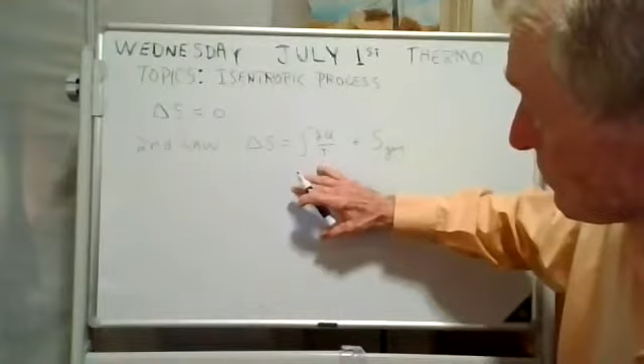Now, if the change in entropy is zero, that must mean that this term will be zero. And this term, well, let's put it this way: if this term is 0 and that term is 0, then you got 0 plus 0. Hey, that gives you 0. And so you have an isentropic process. Now, for this term to be 0,

what would be required here—let me, I'm always picking on Stuart, but I don't know if he's with us. Yeah, Stuart's with us. Stuart, I want you to answer this question: if this term here is 0, how could that be, Stuart? How could you get this term to be 0? What do you think? He's thinking. We're going to make that term 0. How do you make that term 0, Stuart?

Demute, unmute. Stuart, unmute and tell me how you get this term here to be 0. Uh-oh, he's still fixing his coffee. Never mind, he's busy. One way is if the heat transfer is 0, then this is going to be 0.

Now they have a fancy name for that. If the heat transfer is 0, they call it... Stuart wasn't going to help me. Let's go to my friend Spencer.

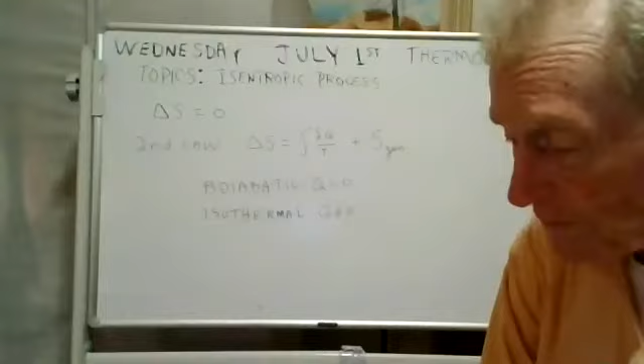Now an example of that would be if you had a bicycle pump and you push down on the handle there on your bicycle pump. See, what you're doing is you're compressing the air, and it gets hotter. I'll tell you what you do, get a bicycle pump and pump up your tire.

Push on that bicycle pump for about 100 times, and it doesn't do a heck of a lot to a car tire. You'll go from about 30 to 35 psi. I've done it before, but it'll take you about 100 pushes. You'll be wore out by the time you get 5 psi more in your tire.

But see, it's adiabatic. The temperature is changing. You can have a change in temperature, but the heat transfer is 0. What's making it hot is all that work. See, there's work transfer, there's heat transfer, they're different. And pushing on that bicycle pump, you're doing work and you're compressing the air and the air gets hotter. I hope you guys aren't confused.

If you are, ask me something. But there's a big difference between adiabatic and isothermal. Now, if this Q here is 0, well then this term is 0 because you're just dividing by Kelvin or Rankine temperature, and it's never 0 unless you're awfully cold in outer space.

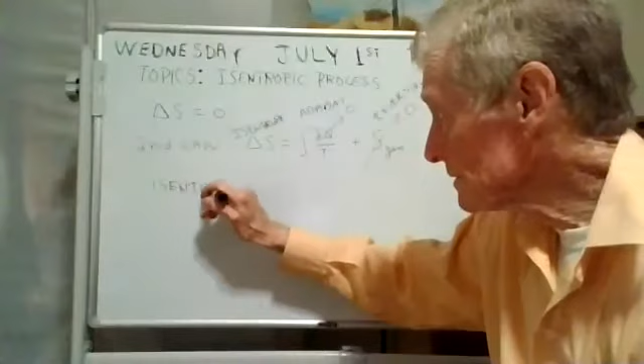But if you have a reversible adiabat, then you've got an isentrope. Let me write that down for you. See, if you have delta S equals 0, that's what an isentrope is. And another name for an isentrope is a reversible adiabat.

Now, I will tell you one little tiny wrinkle. It's possible to have an isentrope where these aren't zero. Let's say this comes out to be -5, and this comes out to be +5. That's just an example. But -5 and +5 could give you zero, couldn't it? So it's possible to have an isentrope that is not reversible, because if this is +5, that's not reversible. And if this is -5, that's not an adiabat.

Remember the rules about generated entropy. If it's 0, then you have a reversible process. If it's bigger than 0, you have an irreversible process. If it's less than 0, it is impossible - you have just violated the second law of thermodynamics. So it's possible to have an isentrope that's not an adiabat, but you're going to have a heat transfer out in order for that to happen.

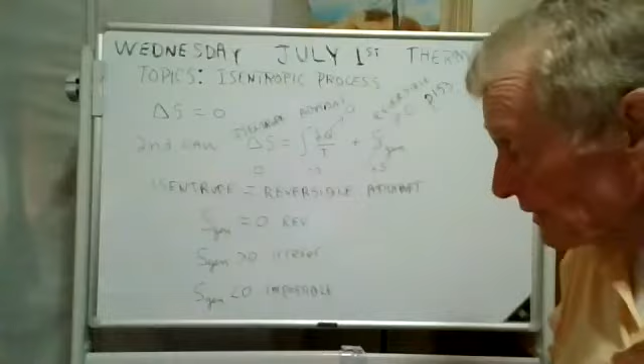Okay, now what we're going to do is talk about an isentropic process with an ideal gas. You can have an isentropic process with steam or refrigerant or ammonia or pretty much anything, but right now we're going to be talking about what happens with an ideal gas isentropic process.

Okay, do you remember we derived this equation? I showed you this equation, I don't know whether this was Monday or not. Hey, I'm going to go with little letters - you can write this with big letters, or you can write it with little letters. The little letters are really better.

We derived that equation from those Gibbs equations, those TDS equations. We derived the TDS equations, and then we derived this equation here for the change in specific entropy from those TDS equations, or some people call them the Gibbs equations. I wonder if anybody remembers that. Let me ask one of my wonderful students here. Cameron, do you remember us deriving this equation, talking about this equation? Yes, I do. Yay! Good deal.

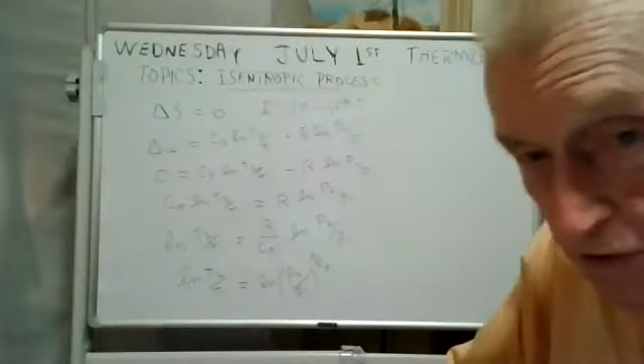Okay, now we're doing another algebra step. See if you can get to here now. Now this one is a little tricky, but you guys all took algebra. I bet you can get to there. Can you get from here to here? I hope so. Hope you can see that good.

Okay, well, we're almost done and we're going to have a wonderful equation for an isentropic process with an ideal gas. But I need the room, so I think what I'm going to do is write this up here where I have some room. And then we'll do an example. Wouldn't that be fun? Now let me write this one up here now.

All I did was just scoot it up there where now we got room, and I'm going to erase all this stuff here for a minute. All you need to know is all that stuff comes from an isentropic process

with an ideal gas. Now, I showed you guys this. I don't know if you remember, but R is equal to C sub P minus C sub V. I showed you that from scratch one day. We can go back over it if anybody wants me to. We don't have time to go back over everything.

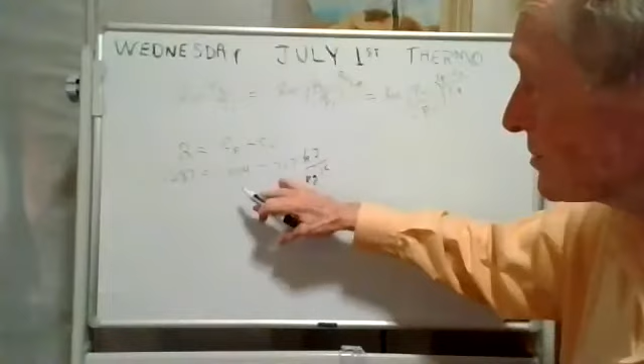So I'm going to erase this, but that was kind of fun to do. Hey, I didn't put the units on this deal here. What's going to happen to you if you don't put units on your stuff? See, that's the units: kilojoules per kilogram Kelvin. If you don't put units, you're going to lose a point. We don't want that to happen. Supposed to put units on there. Okay.

Now, see if you can get to here with me. We're almost done, I keep saying that, and then I can just keep on going, don't I? Can you write it like this? Can you get to here? I bet you can. Okay, 2 more steps. What's this now? See if you can get to here.

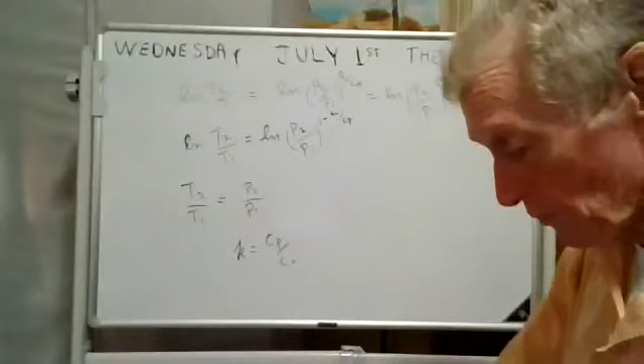Now, I'm going to define something called the specific heat ratio. What it is: C sub P over C sub V. It's always bigger than 1. It has a fancy name. It's called the specific heat ratio.

They've got them in the book back there. If you go back here in the book and look in the tables, I'm looking in the tables. Yeah, I see some K's back there. So I see some K's for a whole bunch of things, for steam, air, ethane, helium, etc. They have these in the tables in the back. They're called specific heat ratios.

But see, this is C sub V over C sub P. This is C sub P over C sub V. So what we have here is 1 minus 1 over K. That's what we have. Or you could write it like this. Ta-da!

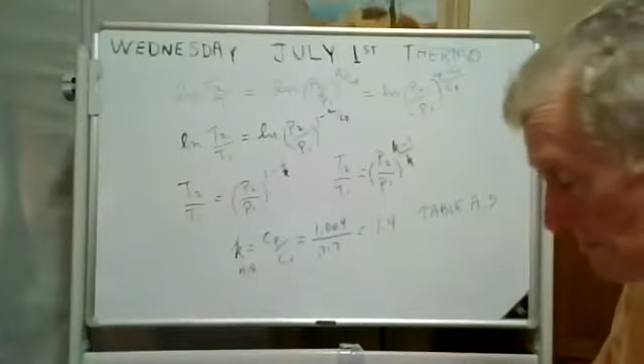Look it up when you get time, and you'll see K is 1.4. They have Ks for everything in there. For helium, if you wanted to find the specific heat ratio, it's 1.667. That's what they have in table A.2. You know, it really is 1.666 repeating forever. They rounded it off, is what they did. Okay, we got us a great equation there.

And that's a keeper, and we'll be using that on our example we're going to do here in a minute. Does anybody have any comment or question before I continue on with this fascinating topic of isentropic processes? Well, nobody said anything. Okay.

Now, there's another equation that would have been fun for me to derive. See, this equation here was derived from this equation here. We took that equation, and I know each of you are taking notes, anything I write down you got in your notes. We took that equation and we did some algebra. We did some algebra, oops, there we go. And bingo, we came up with a wonderful equation.

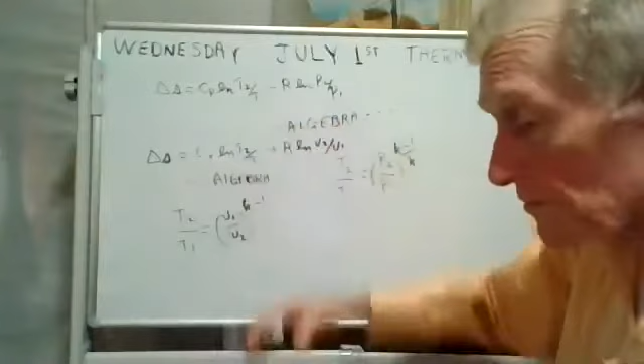And you got to be careful because you got a 2 over 1 here, but you got a 1 over 2 here. It would be fun for you guys to take that and follow the method I did a little while ago and see if you could come up with this equation. So let's put those together. I like this. Ta-da, and now we have a really nice equation we can use for an ideal gas isentrope. Ideal gas isentrope. And you know what an isentrope is - an isentrope is when delta S is 0. Okay, well, great.

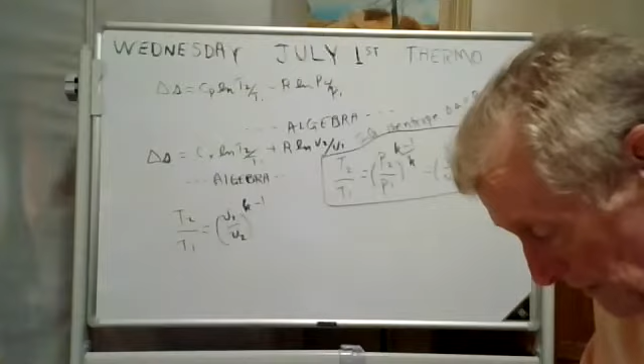Anybody comment or question on that before we do an example? Well, okay. I thought maybe we could do problem 6-51. We're going to do problem 6-51 here in just a minute, if nobody has anything to say. All right.

And you know the method for doing problems in here. We do the same thing over and over and over again. We do a device sketch, we do a PV diagram. You're not going to forget a PV diagram, are you? You would not forget that important thing, would you? Did you notice on that exam, I think there were 2 questions that required a PV diagram. And now we're learning to do TS diagrams. So from now on, for a while at least, do both.

Do both. Okay, well, let's do that. And then what? After you do the device sketch and the PV and the TS diagrams, then what? Well, you use the first and second laws. That's what you do. And you got to decide now, is it a control mass or a control volume? And you know the difference - you know what a control mass is and what a control volume is. All right, well, let me find this 6-51 and we'll do that. That sounds like fun. Here we go, 6-51.

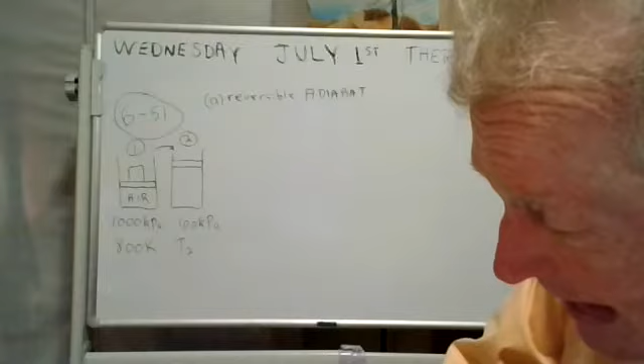We've learned that, and I'm going to pick on Parker, I think. Let me see if I want to pick on Parker or not. Yeah, I'm going to pick on Parker, he's a good sport. Parker, we learned a fancy name for a reversible adiabatic. What is that fancy name, Parker? Unmute. I'm not sure.

That's okay, that's why I bug you guys. Because if I bug you, you'll get it. Parker knows this, it just hasn't penetrated, that's all. Parker, this is called an isentrope. Have you heard that word before, Parker? Isentrope. Parker, say yes. He had to go answer his front door, I think. But if you have a reversible adiabatic, you have an isentrope.

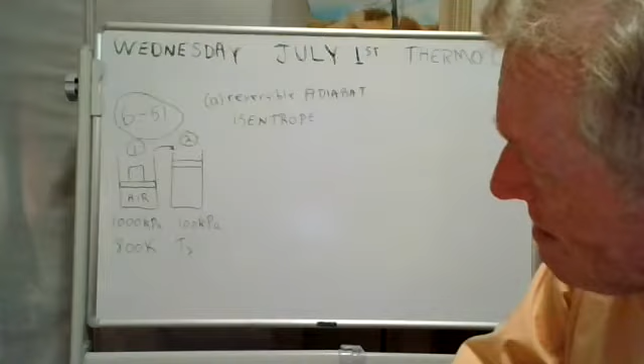What's an isentrope? Let me pick on my next wonderful student. Cameron, what is an isentrope? You tell me, Cameron. Unmute. What is it? I'm not too... I don't think I'm too sure, honestly. That's okay, it's early in the morning and sometimes you have to wake up.

I know somebody must have listened to me. How about my friend Aubrey? Aubrey, what is an isentrope? Unmute, tell everybody what an isentrope is. Is it where the delta S is equal to 0? Yay! Good for you, Aubrey. It's when delta S is 0. That's what an isentrope is.

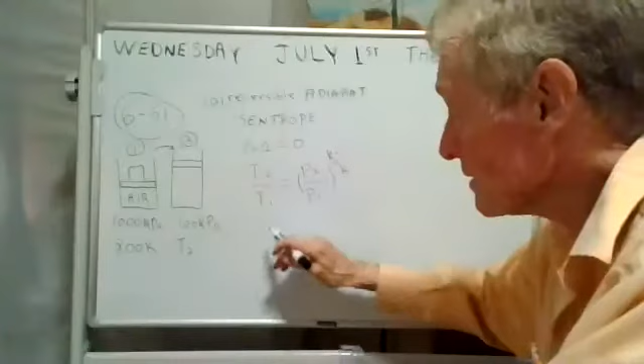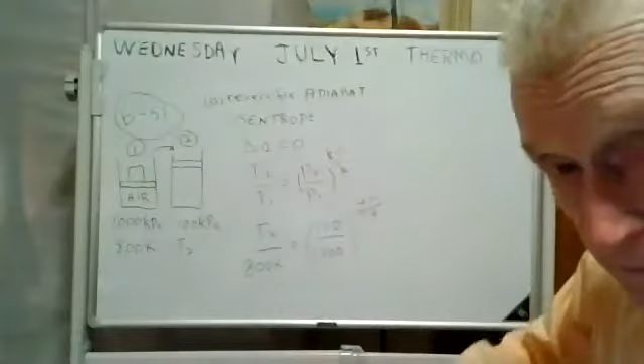And if you have an isentrope and it's reversible and it's an adiabat, then you can do this. Now we know what T1 is. T1 is 800K. And we know what P2 is, and we know what P1 is. And if it's air, we know what K is. So we can get T2 from this equation. Now I'm going to shut up for a minute and a half.

And I want you to do that. This class here is a participation class. You don't need to just sit and watch me do stuff and have all the fun. I'm going to shut up. I want you to find T2. Go for it. Get your calculators out.

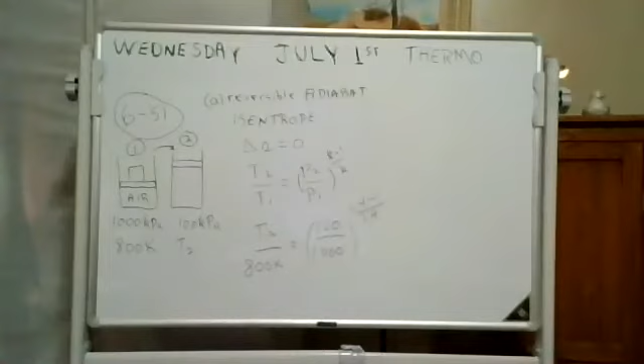Okay, I got an answer. Let me go fishing here for a wonderful student. How about my friend Cameron? Cameron, did you get that T2 yet? If I typed everything in right, I got 414.357. That's what I got, I got 414. I got 414.4 if you rounded it off. Is that close enough to yours, Cameron? Yes. Great, hey, we just got T2.

It's 414. Let's do our PV and TS diagrams now, shall we? Doesn't that sound like fun? If you're all okay, I'm going to erase it because I need the room to do the PV and TS diagrams.

Hey, it got colder, like I said. You see, it's just the opposite of compression. When you compress, it gets hotter. When you expand, it gets colder. Now, let me ask you this, though. I usually do heat transfers in red. Let's put a red heat transfer. There you go.

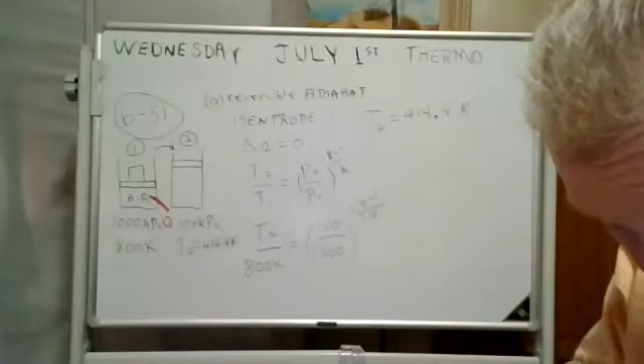Unmute. Tell us what you think the heat transfer is on this reversible adiabatic process. Going in or out? Oh, it's going out, Aubrey says. Nope, it's not going out. Guess again, Aubrey. What's the heat transfer on this reversible adiabatic process? Then it must be going in. Nope, it's not going in either. Oh no. I want you to think what the word adiabat means.

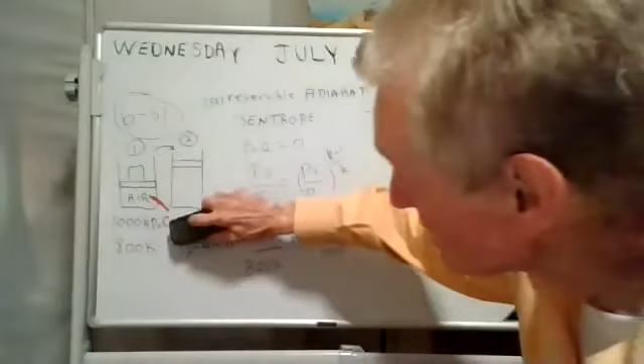Oh, adiabatic. Q equals 0. Yeah, that was not very nice of me, was it? That was a mean trick. There is no heat transfer. It's an adiabat. There is no heat transfer. Now maybe Aubrey will remember that.

I bet she will. Now let's draw the PV and TS diagrams. Here we go. Okay, now you're more familiar with the PV diagram. Now this is air, so you don't want a vapor dome.

Don't put a vapor dome, it's air. I tell you what you could do though. You could go 800 Kelvin, and you could have a 414.4 Kelvin. You could have those. That'd be okay.

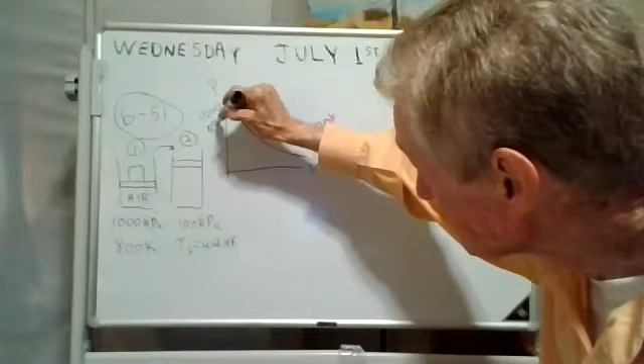And the pressure at state 1 is 1,000 kilopascals, and here's state 2, 100 kilopascals, and here's your process. Yeah, there you go. There's your process. See, they call that a process.

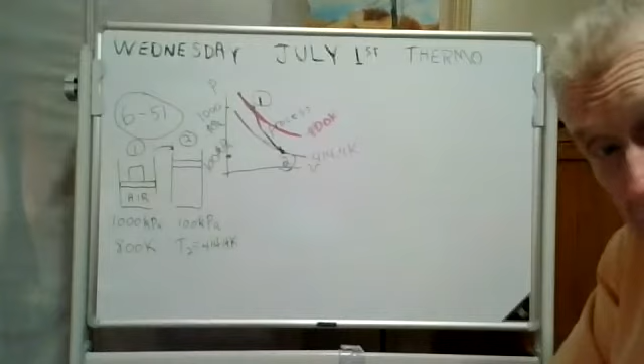We are going from state 1. And here's some of the properties of state 1: there's the pressure, there's the temperature. And we're going to state 2, and here's some of the properties at state 2: you have the pressure and the temperature. And you draw - it's not a straight line. It usually isn't, sometimes it is, but in this case it's not a straight line. That's the process on a PV diagram.

Now let's do a TS diagram. We've got to learn how to do TS diagrams. You don't put a vapor dome in there because it doesn't liquefy, it's air. At the temperatures and pressures like that, it doesn't liquefy.

And now let's put in our isotherms. They're flat. See, the 800 goes like this. There's your 800. And then the 414 goes like this. There's the 414.

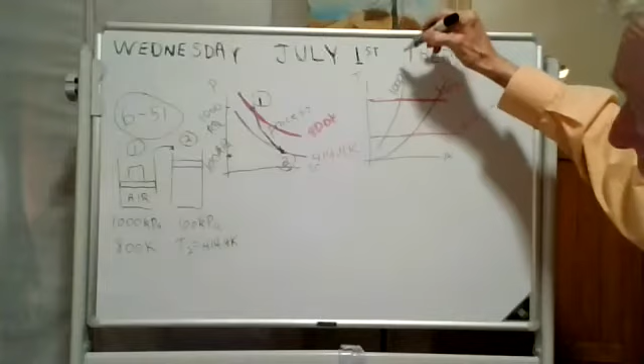And now for the pressures. Well, pressures on a TS diagram, they're like this, they go like that. This is the high pressure, this would be the 1,000 kilopascals. This is the low pressure, this is 100 kilopascals.

Let me doctor this up just a little bit here. There. Yeah, there we go. And now here's our process. Here's state 1, here's state 2, and it goes straight down. There's our process. And you notice it goes straight down because the entropy doesn't change, remember? Delta S equals 0. It's an isentrope.

This process is an isentrope, so it has to go straight down. See, if it curved off to the right, that means the delta S would be positive. If it curved off to the left, the delta S would be negative.

So what? Well, let's finish the problem. They wanted something else, I think. If you just woke up from a daydream, we were doing 6-51. Let me read it here. Piston expanded - what are we supposed to do? Part A, find the final temperature. Well, we did that. Okay, now they want the specific work.

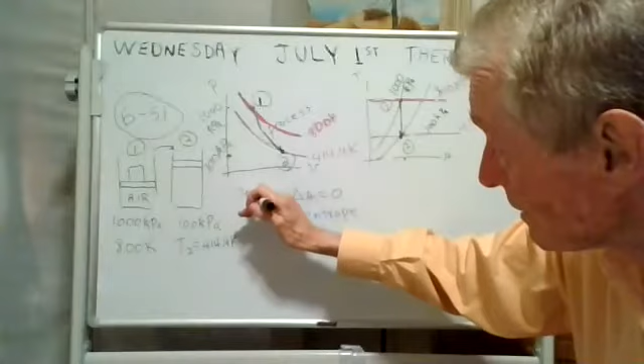Here's what they want us to do. They want us to find that little w there. Okay, well, we have an equation for that. Now, we have an equation for little w that goes like this for polytropic processes. This is an isentropic process, but let me show you the equation for the polytropic process. It goes P2V2 minus P1V1. Now, I showed you this - in fact, I derived that equation for you guys.

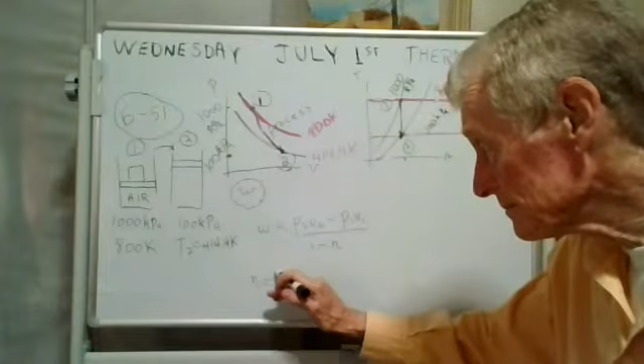And what we have here is a polytropic process where n is equal to k. N is equal to the - what do they call that - the specific heat ratio. Now, how do I know that? Let me come back to that. Let's go ahead and solve this, and then I'll try to explain how come we know that.

Now, I'm too lazy to actually put those numbers in. It's a lot easier for me to just go R T2 minus R T1, and in this case you go 1 minus K. See, P2V2 is equal to RT2, and P1V1 is equal to RT1. So basically, we're just going R delta T all over 1 minus K. Okay, well, let's do that. Now, R for air is 0.287 - probably should put our units in there.

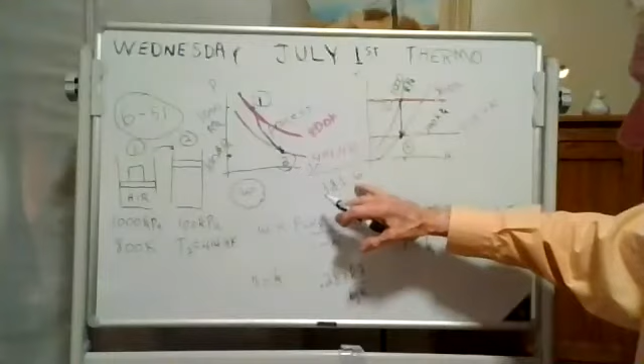And the change in temperature, I can't do that in my head. But I can subtract. Did I do that right? When you subtract that from 800, is that what you get? I think so. So what you get here is...

385.6 divided by 1 minus 1.4. Okay, we're going to get the work done. Wouldn't the 385.6 be negative? We're going from a higher temperature to a lower one.

We have our first honkin' thank you point. And who was that, my friend? That was Spencer. Spencer gets a honkin' thank you point, right? You guys see that big, thick thank you point for Spencer? He's absolutely right, it's negative, and now we're going to solve this. Here we go. Thank you so much.

It's kind of weird, but I get a positive answer. How about you guys? Because the numerator and the denominator are both negative. But we can tell that the work is going to be positive because we know that the area under that graph is the work done.

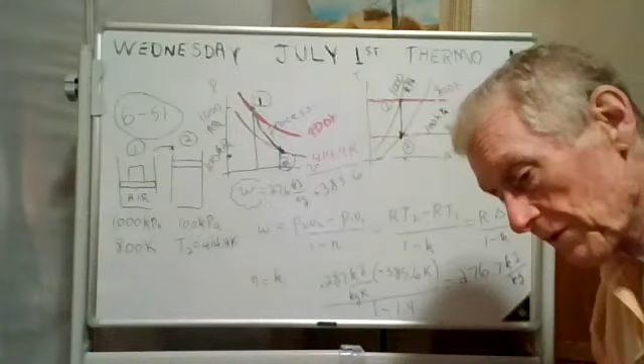We're not done yet. It said here something about considering two different processes, a reversible isothermal process. Okay, well, let's do that.

Well, if you had an isothermal process, I'm going to have to fudge this just a tiny bit to show you this. If you're going to go from 1,000 to 100, you're going to have to go to here. I don't want to call it state 2, let's call it state 3, okay? And here's our process from 1 to 3.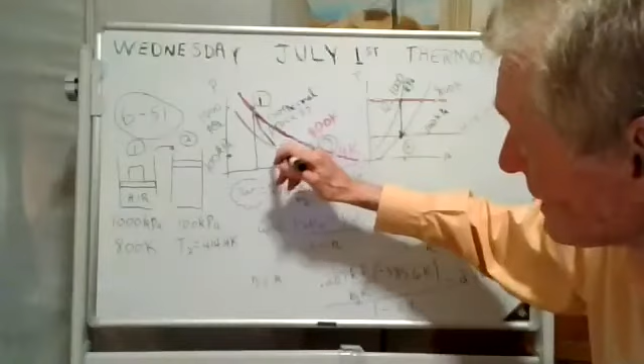But see, that's an isothermal process. See it? That's an isothermal process. Now it goes from 1,000 kilopascals to 100 kilopascals, but it doesn't go the adiabat. This here, that's the adiabat. You see that one there? That's the adiabat. Now I think I told you guys...

...that adiabats are steeper than isotherms. See, here's your isotherm, here's your adiabat. Can you tell that that adiabat is steeper? It's steeper. Adiabats are steeper than isotherms.

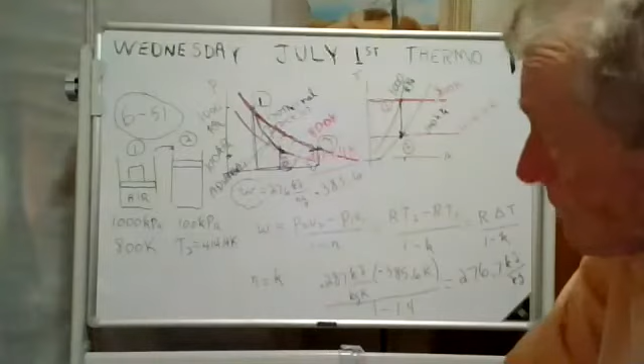Okay, now they wanted us to find the work. Well, now the work there, it's going to be bigger. Can you tell it's going to be this area here? Here, I'll color it in. See, it's a huge area. It's bigger, isn't it? Now, how do you do that?

Well, we need some room here. Now, let me make some room and we'll do that. It's a different formula. What we're talking about now is a polytropic n equals 1. What we just did was a polytropic n equals k, but this is a polytropic n equals 1, and the equation goes like this.

We derived this from scratch too, if I remember right. That's the equation there. Now we don't have the V2 and the V1, but I'm too lazy to figure them out. We could get them, we got enough info to get them, but I think I'm going to be lazy and do this.

We know from the ideal gas law that P2V2 is equal to RT2, and P1V1 is equal to RT1. Now, if you divide equals by equals, you could get V2 over V1.

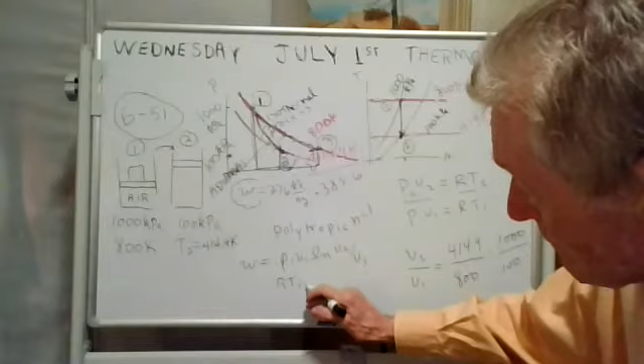Yeah. And you take, when I did all that, I got 5.18. This stuff here turns out to be 5.18. And now we're going to solve it and get the work per mass on that isotherm. Here we go.

All right, natural log of that times, and what's T1 again? Well, T1 and T2, well, now wait a minute. They're both the same. No, this is wrong. No, this is wrong. T1 and T2 are the same.

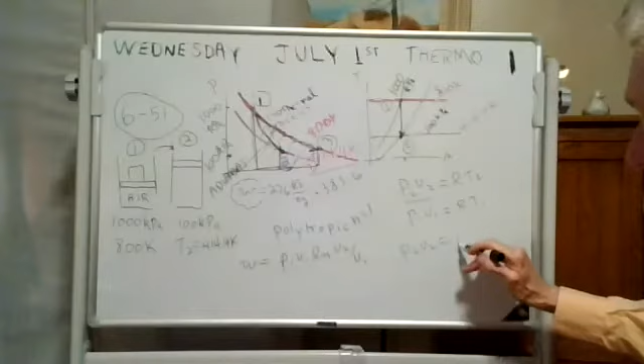I made a mistake there. It's true that P2V2 equals RT2 and P1V1 equals RT1. But if you're going down an isotherm, T2 and T1 are the same, so P2V2 equals P1V1 — see that 1 there on your polytropic thing. So V2 over V1, I made a mistake but I found it, equals P1 over P2, which is equal to 10, I think. P1 over P2. Yeah, it's equal to 10. So here we go.

The work per mass going down your isotherm now is equal to 0.287 — P1V1, RT1 is equal to 0.287 times 800 times natural log of 10. Right? I think so, okay, let's do that.

0.287 times 800 times the natural log of 10 is equal to... I'm getting 528.7 kilojoules per kilogram. Now is that what I got when I did this before? Let's see. 520 — yeah, that's what I got before.

Do you see this big area here? This big area is 528 kilojoules per kilogram. Whereas this little area here, going down the isentrope, it's 276. Hey, you know what, 528 is bigger than 276, isn't it?

Now we haven't drawn it over here yet. See, this from 1 to 2 is your isentrope, and from 1 to 3 is your isobar. Now where's your — what's the word? No, that's wrong, it's isotherm. We're supposed to go down the isotherm. Well, we can do that. Look at here, going from 1 to 3. Here's state 3, and you stay on the 800K isotherm, and you get to the same isobar, the 100 kilopascals isobar.

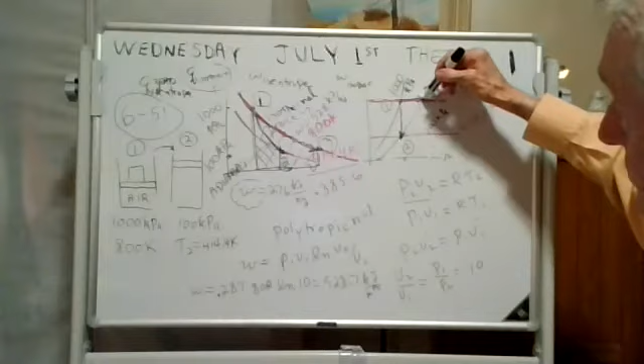Do you see it? Here it is. It's this tall rectangle. See this rectangle? Here, I'll color it in. You know what that is? That's your little Q — the area under a TS diagram is the heat transfer. And we can get it. Here, let's make some room here.

Now the thing is though, whether it's plus or minus. I got a feeling it's minus. I got a feeling that on the isotherm, it's going to go out. But I'm not sure yet. But here we're going to get the amount. The amount is this area.

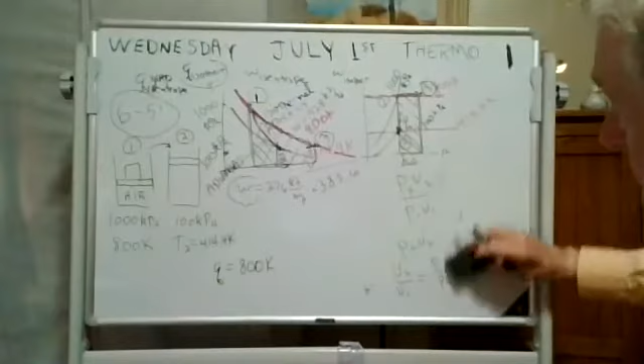Now, how do you find the area of a rectangle? Well, you go height times base, right? Well, what's the height? It would be 800K — that's the height. Now what's the base? Well, that's the delta S, isn't it? It's not 0 for the isotherm. Let's see if we can do it. I think this would be fun to do. Now, they didn't ask us this — we're going over and above what they wanted. But we could solve for the delta S. See this delta S here for this isotherm? I think we could do it. And here's a lovely equation. It goes like this.

Instead of me doing it while you're bored watching, we know all this stuff. We know C sub P, it's 1004. We know T2 and T1: T2 is 800, T2 is 414.4, T1 is 800. We know R, it's 0.287. We know P2 and P1: P2 is 100, P1 is 1,000. We know all of these things, and we could get delta S.

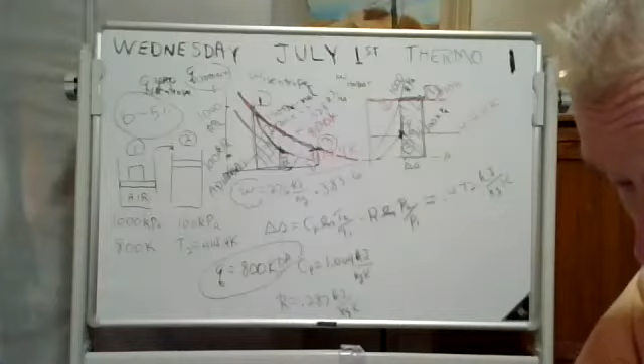Well, here's what I got. I wonder if anybody got that. It could be wrong. Anybody getting that, 0.472? Maybe I should do it again. I need somebody out there to say that's what I got, but I'm not hearing anything.

Let me see who's out there. We've got a lot of wonderful students. I never took roll, let me mark down the roll here, just out of my curiosity, it's nice to know who's here. Today's the 1st of July. Gosh.

This is for us trying to find the isotherm, right? Yeah, we're doing the isotherm, going from 1 to 3. Okay, I think I did it wrong, 0.661, I did it wrong. I'm so glad, who was that just spoke up?

Spencer? You know what I did? This here is 0, isn't it, Spencer? Yeah, because it's an isotherm, natural log of 1 is 0. Yeah, I bet you did it right and I did it wrong. See, this is minus 0.287 times the natural log, is it 0.1? That's what I got. Yeah, okay, now let me do that. Yeah, I did it wrong.

Spencer, was that your thank you point earlier? Yes, sir. Hey look, you got another one, keep up the good work.

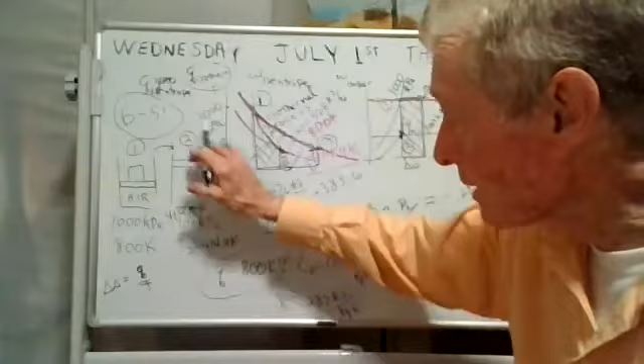We're just assuming that the atmospheric air is 800, the surrounding air around this piston cylinder is 800 K everywhere around it. And so to find the change in specific entropy, there is no generated specific entropy. So the Q is equal to TdS. There it is, there's the TdS. Oh, I remember where we got it - this is the area of a rectangle, it's the height times the width. It also comes from the second law, where you have to add the generated entropy, which there is none. And so Q is equal to TdS.

Well, there's the T, there's the dS, and now we're going to get our Q. Here goes. I don't know if you can see this, it's getting kind of low on the board down there. But I'm getting 528.6 kilojoules per kilogram. And it came out to be positive.

Well, what does positive heat transfer mean? Does that mean heat transfer in or heat transfer out? Let's go to one of my students here. Aubrey, I think I picked on you already, but let me pick on you again. Aubrey, we think that the heat transfer is a positive 528, is that going in or going out? You have a 50-50 chance of getting this right, Aubrey. What do you think? Going in. Good going, proud of you.

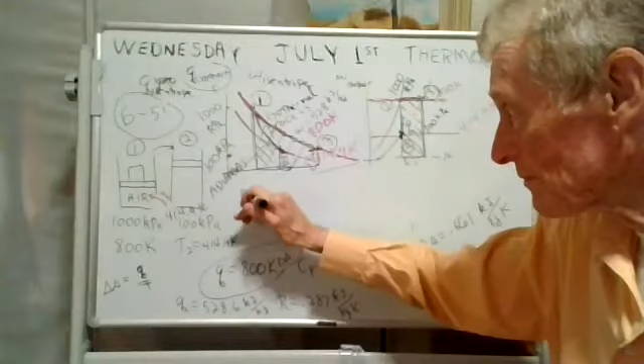So here, let me draw that. There's the heat transfer in. Now let's check this and see if it's right. We'll see if it's right. I need a little room to do that, here's some room in here, we'll use this. I might have to call on you if I erased something vital there. This is just a check to see if it's right. Now we have a lovely equation that goes like this.

We think that heat transfer is 528.6.

Now the work... wait a minute. The work we got was 528. But now I'm getting lost. Was that work for the 1 to 2 or for 1 to 3? What was the work on the isotherm?

Oh gee, I hate it, but I think I erased it. Here, let me look and see. The work on the isotherm was 276. I think we had it on the board a little while ago.

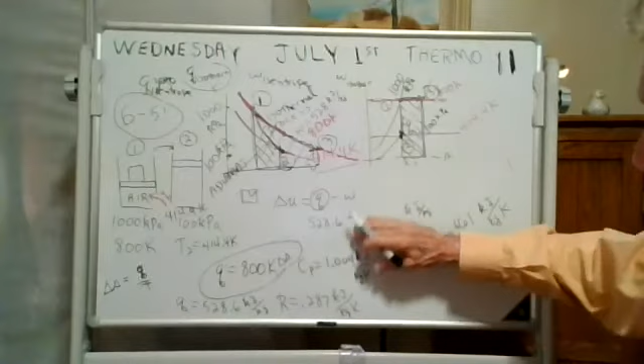You guys are taking excellent notes. For the isotherm, is that the isotherm? No, that was the isentrope. The work on the isotherm was 528.

Yeah, this makes sense, guys. This is called checking our work. Now, I think we have a round off problem here, but basically, for the isotherm, the change in specific internal energy is approximately 0. You got 528 minus 528, that gives you 0. Does it make sense that if you go down an isotherm, the change in specific internal energy is 0? Does that make sense? Somebody say, uh-huh.

Yes, because if the temperature stays the same, the specific internal energy stays the same. Remember, the change in specific internal energy is equal to C sub V delta T. And if delta T is 0, like you got for an isotherm, then delta U is 0.

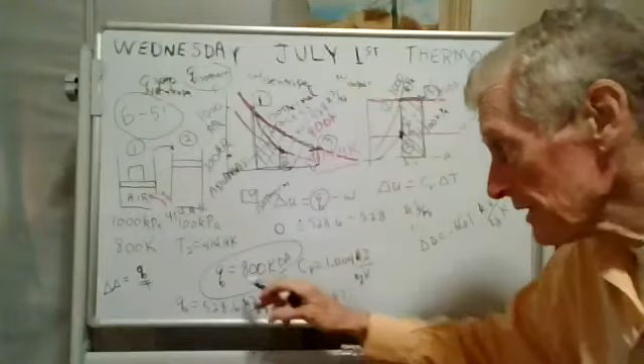Hey, we checked it. We found the heat transfer. The heat transfer from 1 to 2 is 0, but the heat transfer from 1 to 3 is not 0. It is 528.6.

Well, we had a lot of fun with problem 651, didn't we? Wasn't that fun?

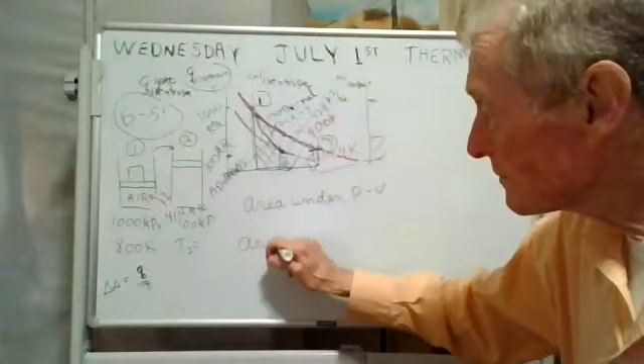I got a question for you, though. Here, let me ask you a question. We'll see if you guys listen to me or if I just bore you out of your gourds and you don't pay any attention to me. Let me go to my friend.

Well, the thing is, I think I've already picked on all of you guys. I think I've lost some people. Did I ever take roll?

Let me see here. This is the 1st of July. What about Megan? I don't see Megan on here. Parker, Stewart, yeah. Bear's not on here. Aubrey, Roxana, Cameron, and Spencer. Oh, well.

I'm always picking on Stewart. Stewart, the area under a PV graph means something, and the area under a TS graph means something. Stewart, what do they mean? Area under a PV is work. Yes. And area under a TS, is that heat transfer? Yes, exactly. That's right.

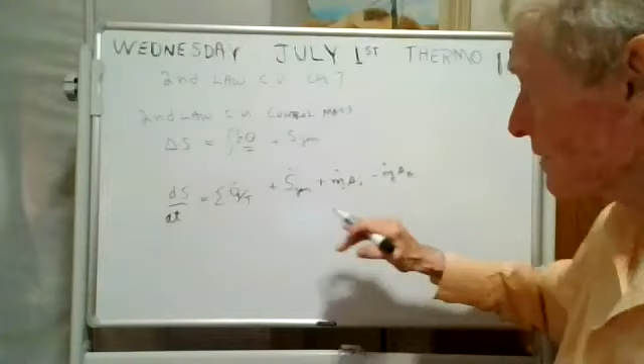You get this. But see, if you have mass going in and mass going out, you have to include that, because mass has entropy. Entropy is a quantity just like pressure, temperature, volume, or whatever -- it's a property. And if mass is going into a system, then entropy is going into the system.

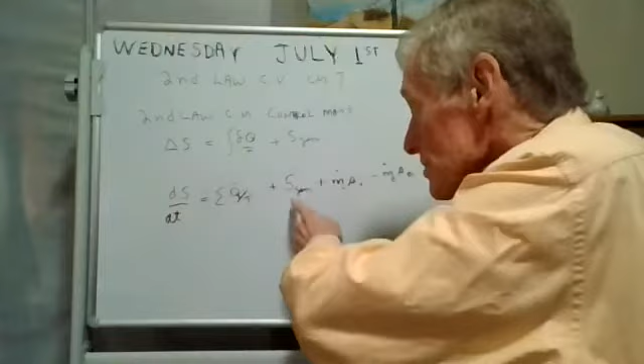If mass is going out of a system, that's the mass flow rate out. It's the exiting -- that m dot with a little e there is the exiting mass flow rate. And if mass is going out, say of a turbine maybe, then entropy is going out. So what we have here is, if you divide through by time and you have a control volume, then these terms -- you can sort of see where they come from.

So now we have our second law. Ta-da, and we're done, we got it. There it is. Now we're going to work a problem.

Now the one I picked out, let's see if I can find what I picked out here. I picked us out a problem. It's 722. Let's do that one. This is going to be problem 722.

Now I don't want to do your homework for you. Let me double check here that I'm not doing your homework. And no, that's not your homework. Great, okay let's do that. Let me find it here.

And we've got our second law, and we talked about it a little bit. And we're going to do problem 722. That's what we're gonna do. Okay, let me find it here and see what it is, 722. Compressor.

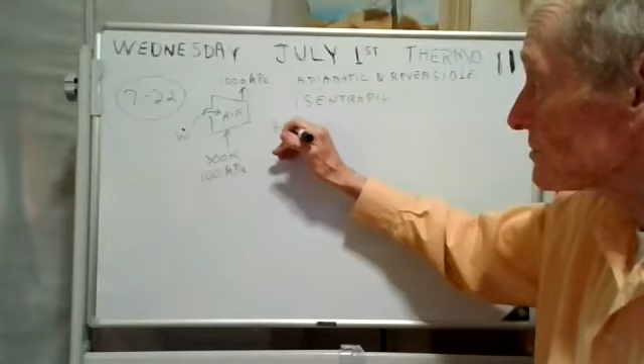See, for a turbine, you have a power output. But for a compressor, it requires a power input. Here, let me write the second law. Here it goes. There it is. That's the second law of thermodynamics.

For a control volume, and this term here is going to be 0. I'm going to give Spencer another chance here. Spencer, why is that term, the time rate change of entropy, why is that 0, Spencer?

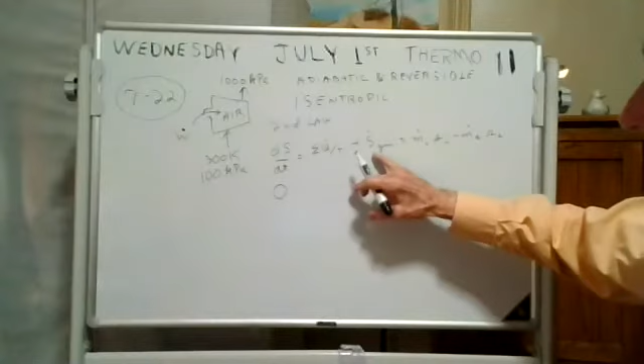It's 0 because it's a reversible process. No, that would be this one here. Or -- what you did was you answered why this is 0, but why is this? Isentropic means the entropy is constant, so the change in entropy is 0. Yeah, you know what? You're right, Spencer. That's good thinking.

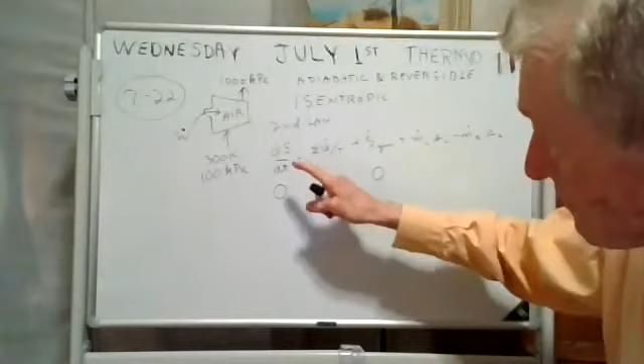There's nothing wrong with Spencer's answer. The answer I wanted was, though -- see what's confusing is these little s's refer to the entropy going in and going out. This big S refers to the total entropy inside your control volume, and it is not changing with time. This morning you had this compressor running and it had so much total entropy in the compressor. An hour, 2 hours, 3 hours later, the total entropy inside the compressor is the same, so it's not changing with time. You don't want to get confused. This deals with the total entropy inside your control volume. These little s's over here refer to the entropy coming in and entropy going out.

Now, the reason why this is 0, the answer I wanted, it's kind of subtle, but the answer I wanted was this is a steady state compressor.

None of the properties change with time. The properties change with location.

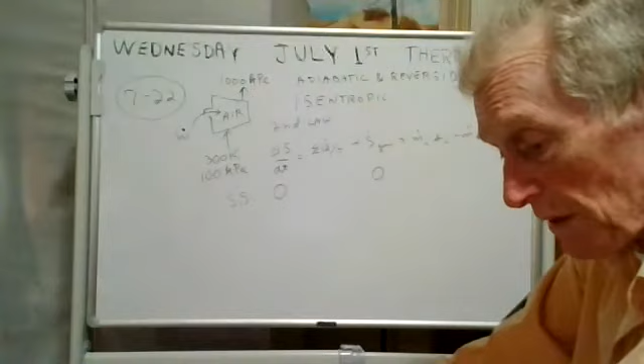Hey, look here. You see the temperature going in is 300. The temperature coming out... no, that's wrong. This is a compressor. The temperature coming out of the compressor will be hotter. But that's a change with location, not with time. Whatever this temperature is, we're going to figure it out in just a minute. Call it T2.

T1 going in is 300 K. T2 coming out is going to be hotter, but it's not changing with time. An hour later, whatever this exiting temperature is, it's going to be the same.

Now here we can get it, because since it's an isentropic ideal gas, we're going to treat air like an ideal gas. We can do this here. We just talked about this.

Now you can only use that equation if you have an isentropic ideal gas. Well, we do. It's air. It's an isentrope because it's adiabatic and reversible. That's an isentrope, and air is an ideal gas.

And looky here, we know T2... I'm sorry, we don't know T2. We know T1, it's 300. We know P2. We know P1. And we know the specific heat ratio for air, it happens to be 1.4.

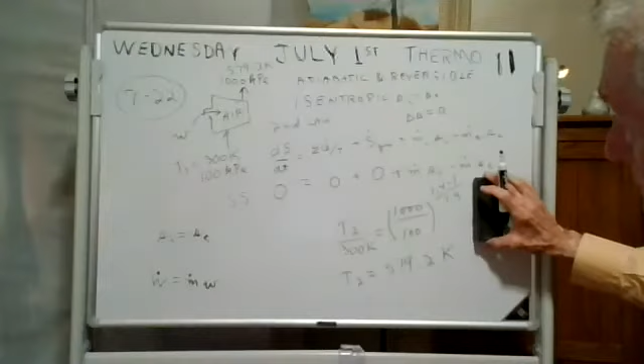Okay, well, let's see if we can do that. I need some room here. Anybody have any questions before we figure the work per mass that has to go into this compressor? Okay, well, here we go. We're gonna need some room to operate here.

To get that little w, we're going to have to do the first law of thermodynamics. See, this is how we do our problems. We draw our device sketch. Hey, wait a minute, oh, I'm forgetting something. What about the PV and the TS diagram? We need to do those. Doesn't that sound like fun? We will in a minute, but here, let me go ahead and write the first law. You guys know and love this first law, but see, this is a control volume. You've got to use this form of the first law.

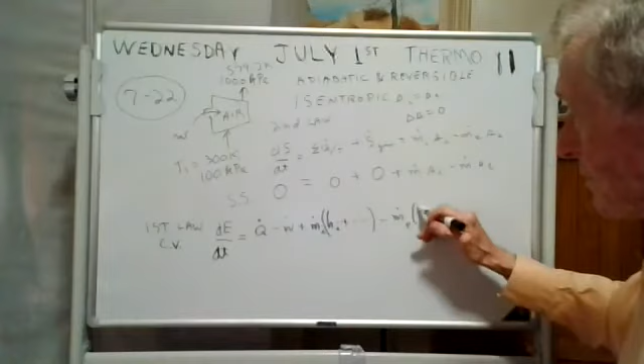Now there's some other terms here that I'm too lazy to put in, but I don't think we need them. Those terms deal with kinetic and potential energies, and I think it's negligible. I don't think this compressor is moving at all, so it's not changing its kinetic energy or its potential energy.

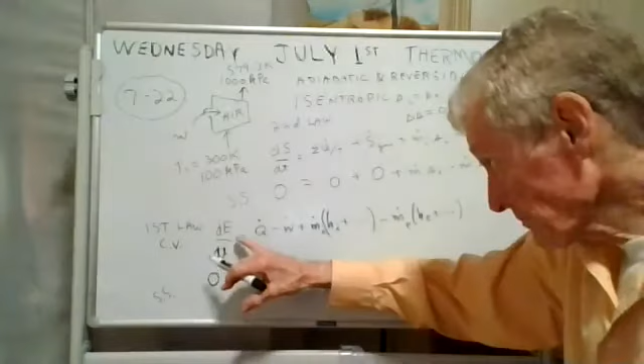All right, well, this here is 0. Now if I ask you, how come that's 0? The answer is because it's steady state. This is a steady state compressor. The properties do not depend on time. This temperature here is 300 going in. Hours later, it's still 300 going in. All the other properties do not change with time. So the total energy inside your compressor does not change with time. So it's 0. It's a steady state compressor. It's adiabatic, so there's no heat transfer rate with the environment.

This is a keeper, though. You've got to have power input. The m dots are the same, so you could just write them like this. Do a little algebra there.

Now see if you can follow my algebra here. Why don't we just call it delta H? Well, no, it's negative delta H, isn't it? And you're multiplying, you're not subtracting. See, delta H is final minus initial. Delta H would be HE minus HI, but what we've got is HI minus HE. So that's negative delta H.

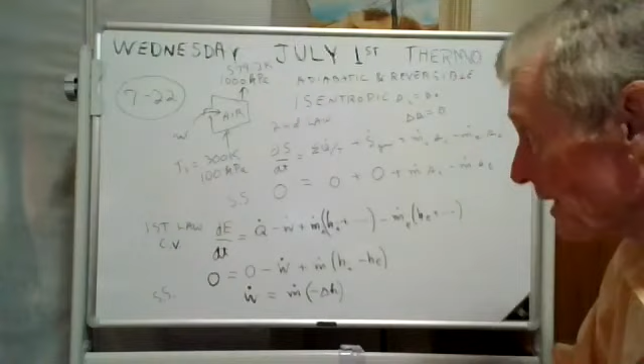Okay, now if you divide through by m dot, here's what you'll have. And make a little room here someplace. And we'll finish off this problem. They wanted little w. Little w is big W dot over M dot. And that's equal to negative delta H. Did you follow to that okay with everybody?

And you know how to do this, don't you? This is C sub P delta T. Well, what's C sub P? For air, it's 1004. And what's delta T? Going from 300 to 579, that looks like 279 to me. 279.2 K. And now wait a minute, there's a minus in front. And so we're going to get our work per mass. Here we go.

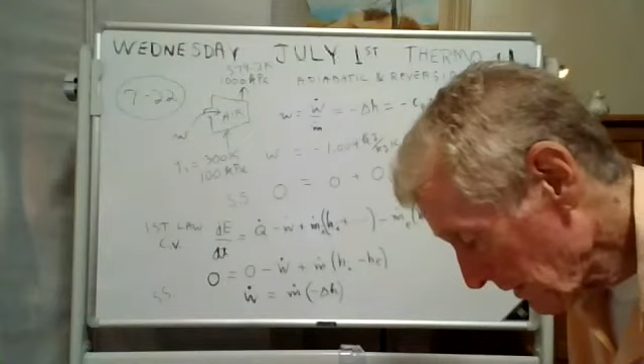But hey, we got a little bit more time here, and let's do another problem. Those problems were all metric. I think maybe we should do an English problem. Let me see which one I want to do here. Just a minute. We got to know how to work in English, you know. Some of you might get a job in the United States. They still use English there.

Okay, well, I got one here that looks pretty good. Now, before we tackle an English problem, is there any comments or questions? All right. Okay, well, we're going to tackle an English problem. Now this one is, I'm going to erase all this stuff.

Now these problems, we only have a half hour left. And the chances are that we won't finish this problem, but oh, doggone it, I was going to do a PV and TS diagram on that last one. Is it too late to do that?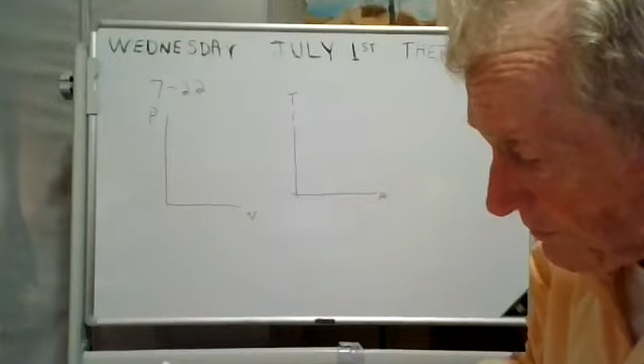We might still have time to work on an English problem. Unfortunately I erased all that, but I think I have some of the info here. We know we came in at 100. We know the temperatures: 300 and 579, 300. We got all this a little while ago. So this is how you would draw those here. See, that's the 300, 579.

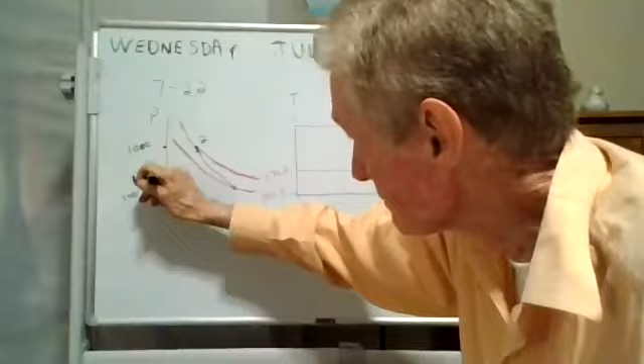Now the pressures. Well, you came in at 100 and you went out at 1,000. So you go like that. Come out here at 1,000. Come in here at 100 kilopascal. There you have it on your PV diagram.

Now, what does a TS diagram look like? Well, you've got the 1,000 kilopascals like that, and the 100 kilopascal like that, and there's your diagram.

Now they have a name for that process. They have a name for this process. And let me pick on one of my wonderful students here. Let's see, there's only 5 of you guys, but my IT person is going to have this on YouTube, and the rest can watch it. Stuart, I'm always picking on you. Stuart, what's the name of this process? It's got a name. It's called a... go for it, Stuart.

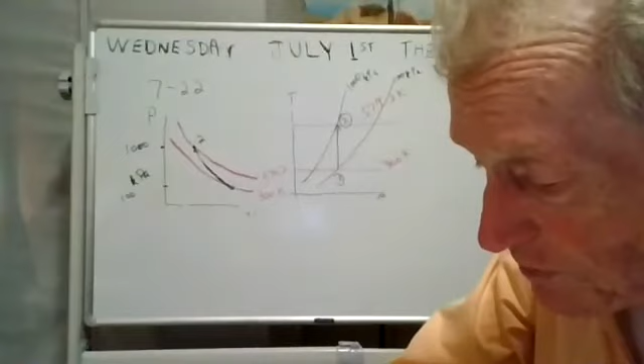It's not an isotherm because I didn't follow the isotherm. It's not an adiabat. Wait a minute. Yeah, it is an adiabat. I think I just gave away the answer. But it's a very special adiabat. What is the name of this particular adiabat, Stuart? Isentropic? Yeah, it's an isentrope. It's isentropic. Its delta S is 0.

Hey, do you see the delta S doesn't change any? The S, the little S just goes straight up. Now, if it was a turbine, everything's opposite. Your 1 would be here, your 2 would be here, and you'd be going down for a turbine. But that was a compressor. It wasn't a turbine.

Okay, there I did it. I did my part, and you will too. If you have a process, you're going to do a TS and PV, aren't you? To keep me happy. Oh, yes, we will, Mr. Griffin. Okay, well, let's give this a try.

Now, this is going back to the control mass problems. But we got to know how to work in English, senor. Okay, now this is problem 6147E. Let me read it. Let's go back, find 6147E, and we can at least draw the device sketch and maybe the PV and TS diagrams. That would be great, wouldn't it? And then we could start on the first and second laws. That's how you do these problems.

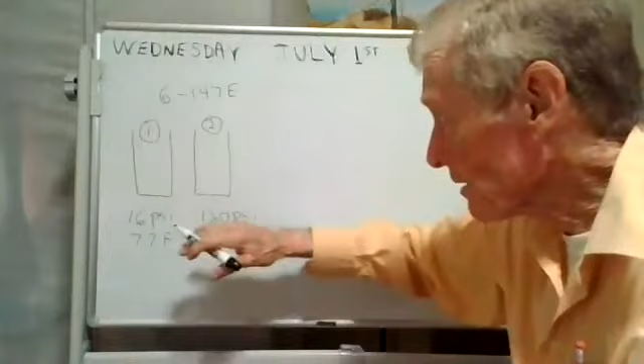And I think I'm going to let you do that. I'm going to shut up for one minute. I want you to put the piston in here. Now it might go up, it might go down. You try it. Put the piston in there, and then I'm going to put it in there, and we'll see if we agree.

Okay, you've had a minute. I'm going to put my piston in there now. Do you notice that pressure went up? My guess is, here's your piston, state 1. And then here's your piston at state 2. Put a heavy weight on there. Look, that pressure went up a lot. See it? That's what happens when you put a heavy weight on a piston, the pressure goes up. And you know what? The volume went down, didn't it? The volume went down and the temperature went up. Did you know when you compress air, the temperature goes up? Now, does yours look like that?

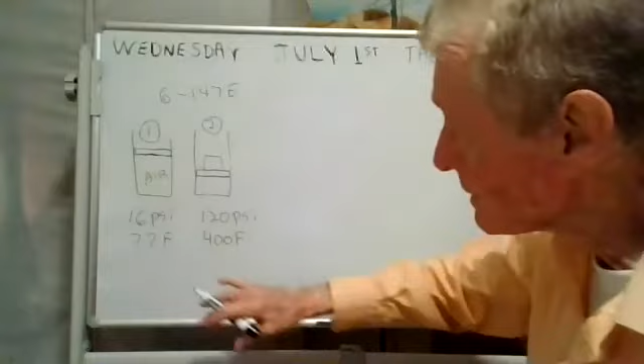Hey, while we're at it, let's go ahead and get the specific volume. Now the way it works is P1V1 equals RT1. If you know the temperature, R, and P, you can get V1. And P2V2 equals RT2. We know T2, we know R, and we know P2, so we can get V2.

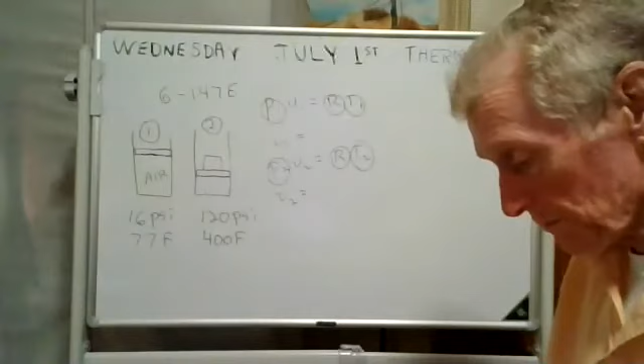Now let's give you a minute and a half. This is good practice, we're kind of reviewing stuff here. I'm going to shut up for a minute and a half. I want you to find V1 and V2. Go ahead.

Well, I got V1, but you might need more time. Let's give you some more time to get it.

This is a good review. Roxana, I'm always picking on you, you're such a good sport. Do you have that yet? V1? One second. Yeah, take your time.

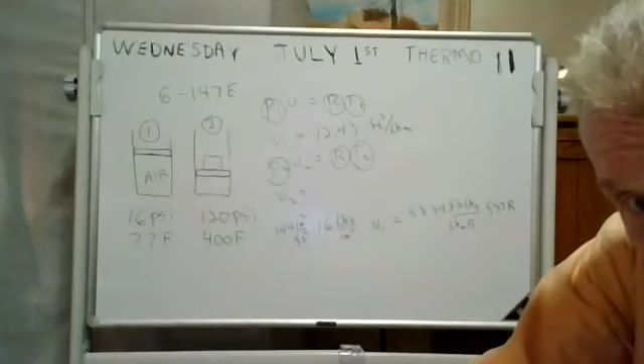We'll see if we can pick on Parker. Parker, do you have that little v2 yet? I got 2.65, that's what I got.

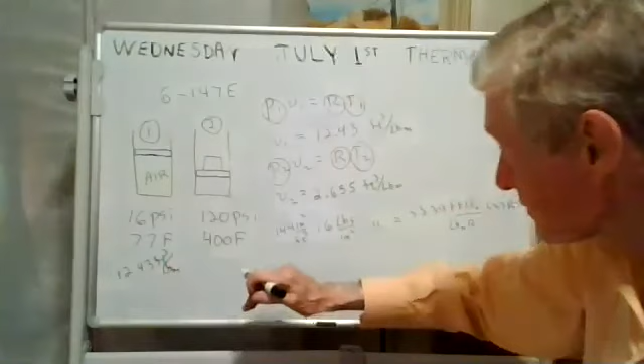Now, does anybody need me to write that out, or are you okay? If you're not, I could write it out. But here, let's put these. This is 12.43 cubic feet per pound mass, and this one is 2.655 cubic feet per pound mass.

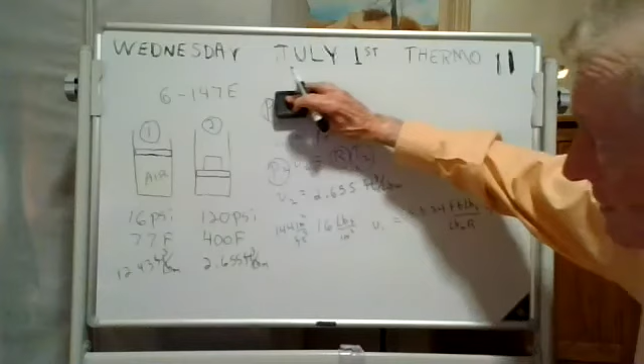Okay, let's draw the TS and the PV and the TS. Here we go, we're going to draw that now. I'm going to erase this if it's okay, unless somebody says wait, Mr. Griffin, wait, not yet, not yet. You better say it pretty fast, because I'm going to erase it. Nobody said anything. I need this room here for my PV and TS.

Okay, well here goes. This is kind of a little review thing here. All right, now this is going to be the PV, and this can be the TS. Okay, well let's get some red stuff on here. And why don't we have a 400 Fahrenheit and a 77 Fahrenheit. There it is, a 400 Fahrenheit and a 77 Fahrenheit.

Okay, now we're going from 16 PSI to 120. Yeah, there you go. State 2, state 1, 16 PSI, 120 PSI. Okay.

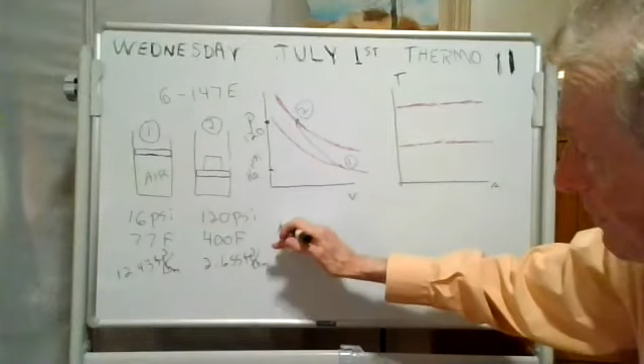Before I do this one here, I'm going to pause and figure out my delta S. Now we've got a lovely equation for that. I think we know all this stuff. Let's plug in our numbers. We know this here is 1004, or 1.004.

And this has got to be Kelvin, doesn't it? Well, roughly it's 860 over 537. Now this is wrong. This is wrong, that was an SI thing. We're in English, senor, see that E?

I think the CP is 0.24, isn't it? See, that makes it so complicated. I'm sorry, but that's just tough.

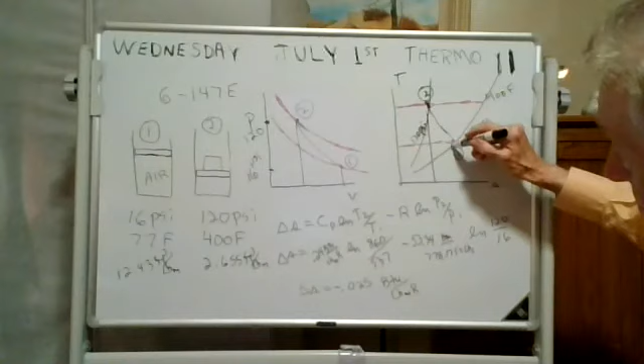We have just drawn the PV and the TS diagrams. Interesting. And you know what this area is underneath the PV, and you know what this area is here under the TS. Now, let me ask one of my wonderful students if they paid attention earlier.

Aubrey, this area represents something under the PV diagram. What is it, Aubrey? Work per mass. That is correct. And Aubrey, this area here under the TS diagram represents something. What does it represent?

I don't quite remember. See, that's good, because now if you don't remember, others don't remember. And this is a little W. I'll give you a hint. It'll be a little something. Aubrey, what do you think? Heat transfer per mass. Yeah, it's a little Q. There you go. And in both cases, the answer is going to be negative. This little W is going to be negative

because you're compressing. Have I ever told you guys that compressive work is negative and expansion work is positive? I ever mentioned that? What, about 5 times maybe? And so it turns out that the heat transfer is negative also, because you're going here to the left. I think we're going to get a heat transfer that's out, which kind of makes sense.

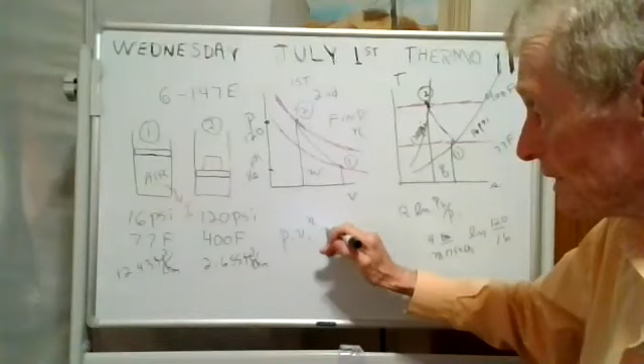what they call the polytropic constant. They said this was polytropic, didn't they? I lost my place. Yes, they said it's polytropic. So I only have 2 minutes left, but here's, if we had time, here's what we would do. We would go P1 V1 to the n is equal to P2 V2 to the n.

Now, don't we know P1? Well, yeah, P1 is 16. Don't we know P2? Well, yeah, P2 is 120. Don't we know V1? Well, yeah, we figured it out. It's 12.43. Don't we know V2? Well, yeah, we figured it out. It's 2.6, blah, blah. Here's an equation with only one unknown.

If we had more time, we could do that, couldn't we? Oh, of course we could, Mr. Griffin. We could find the polytropic constant. And once you did, you could find little w because it's equal to P2V2 minus P1V1 all over 1 minus n, and you know all that stuff. We could get little w.

Oh, gee. But how would we get little q? Well, in this case here, you would use the first law, but the first law in this case is for control masses. It's q minus w. If you could get little w, delta U is easy. You know how to do that.

It's sad though. Our time together is coming to an end. But hey, cheer up. You got homework to do. And read ahead. And we'll have more fun next time.